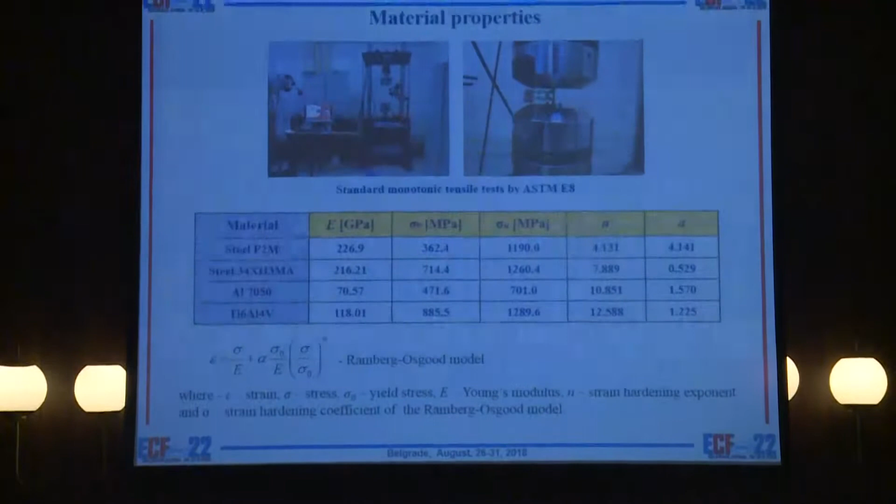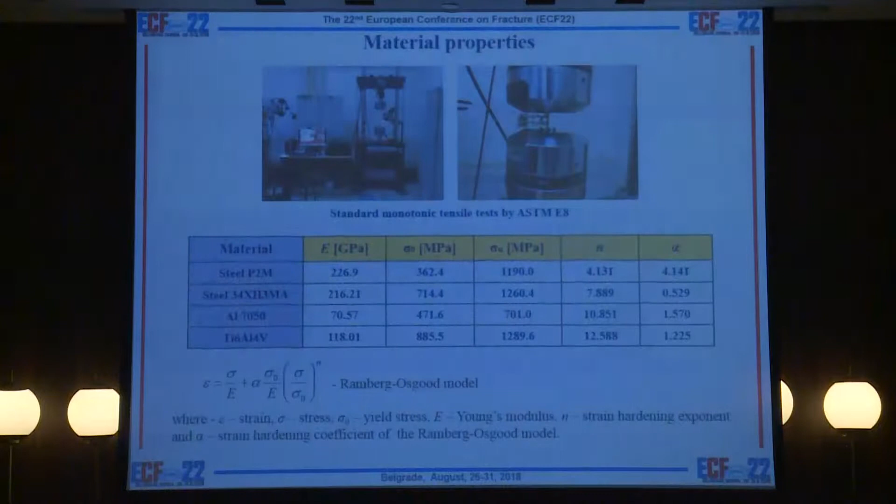As I said, one of the main aims of this study is evaluation of effects of elastic plastic material properties. We considered four types of materials: two types of construction steels, an aluminum alloy, and a titanium alloy. The main mechanical properties for each material were obtained by standard tensile tests, and stress strain curves for each material were described by the well-known Ramberg-Osgood equation. These mechanical properties form the basis of our finite element modeling.

Now I would like to talk about the nonlinear fracture resistance parameters which we analyzed in this study. The first of them is the stress triaxiality parameter. According to the well-known Professor Hutchinson, it is a very convenient parameter for describing in-plane and out-of-plane constraint effects in cracked bodies.

In this study, we proposed to use the plastic stress intensity factor for mixed mode characterization. The plastic stress intensity factor can be expressed directly through the elastic stress intensity factor by using the well-known Rice J integral. In order to calculate the plastic stress intensity factor, you need to know values of the governing parameter of the elastic plastic stress field around the crack tip, the In integral. We used a numerical procedure for calculation of the In integral proposed by our colleagues Professor Shlyannikov and Dr. Tumanov.

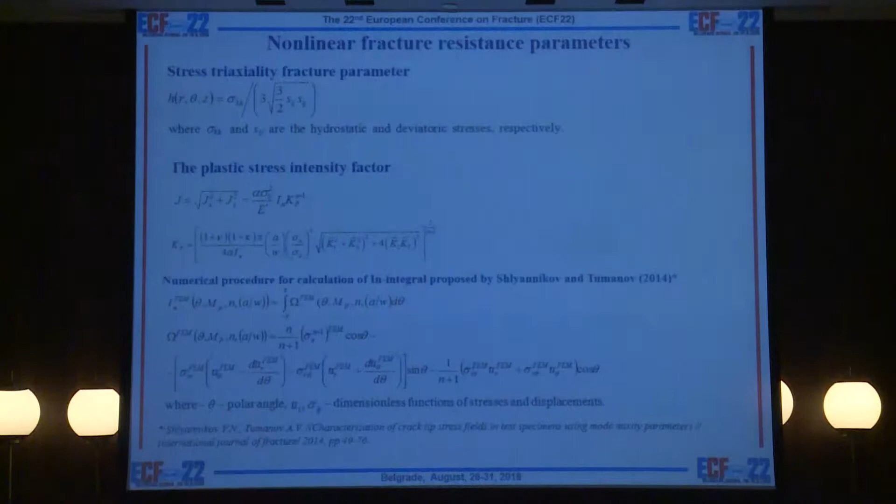The last nonlinear fracture resistance parameter is the well-known J integral. Some days ago, we had a great opportunity to attend the lecture of Professor James Rice. In this study, for calculation of J integral, we used the algorithm of numerical determination proposed by Lee and Liebowitz.

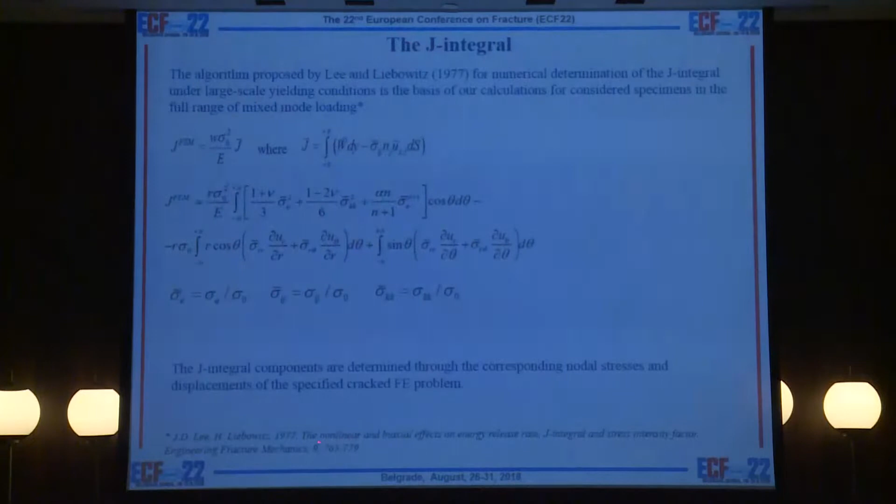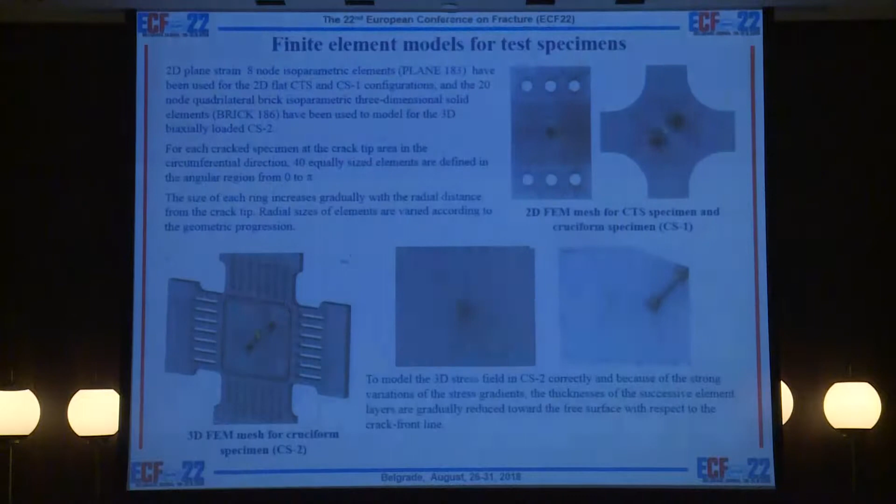In this figure, you can see the finite element models of considered test specimens. In the case of a compact tension specimen and a flat cruciform specimen, we used a plane strain 8-node isoparametric elements. And in the case of cruciform specimen with finite working area, we used three-dimensional 20 nodes isoparametric elements.

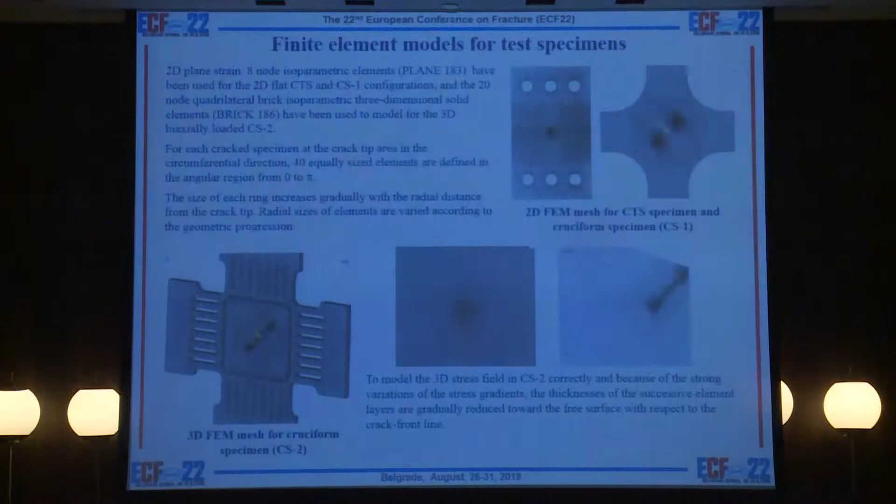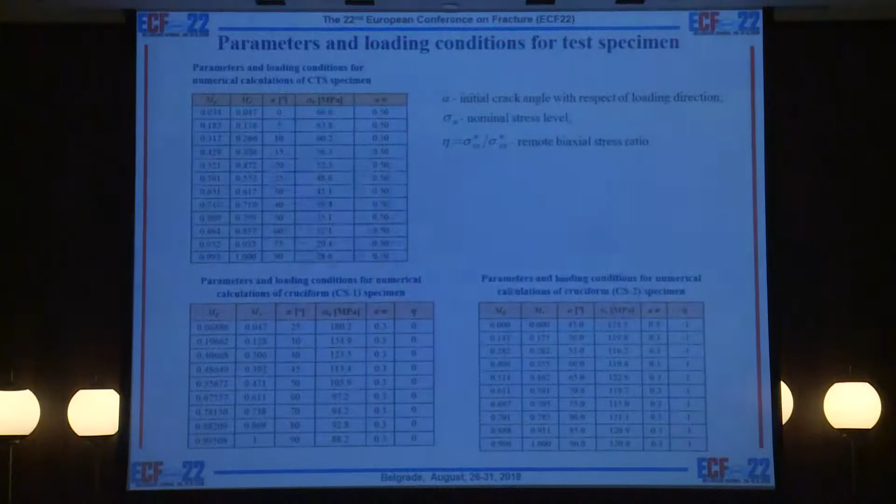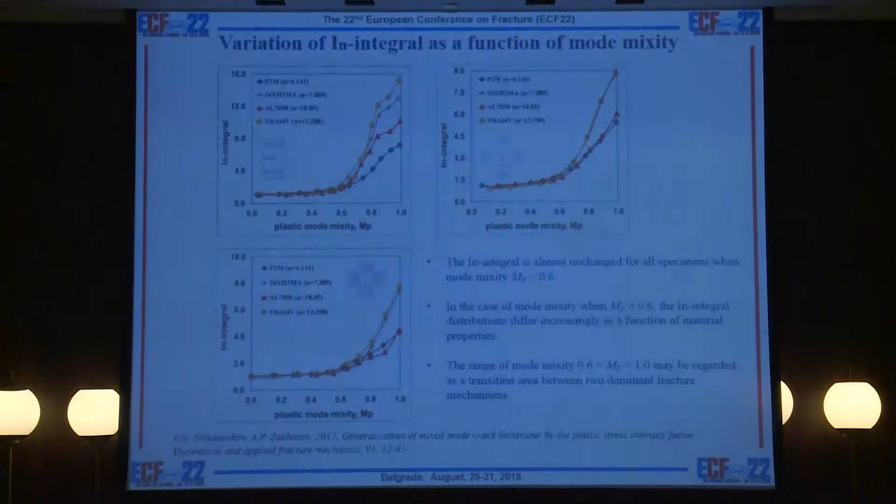mode mixity MP is lower than 0.6, and in the case of mode mixity when MP is higher than 0.6, it is observed a significant effect of elastic plastic material properties. And this region, when mode mixity MP varied from 0.6 up to unity, may be regarded as a transition area of between two dominant mechanisms.

In this figure, you can see the In-integral distribution as a function of specimen geometry. Again, I would like to pay your attention that influence of specimen geometry, constraint effect, is realized when the MP is higher than 0.6.

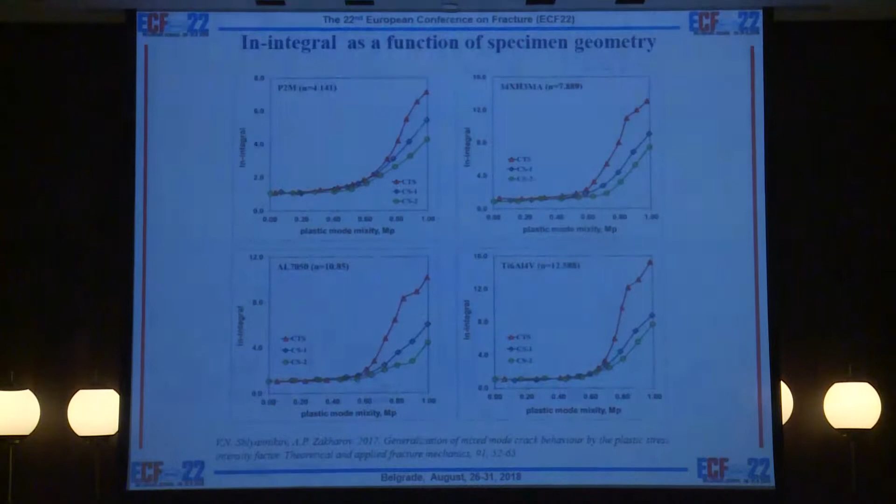And then in the next figure, you can see the distribution of stress triaxiality parameter. Again, significant effect of elastic plastic material properties is observed when mixed mode mixity parameter MP is higher than 0.75.

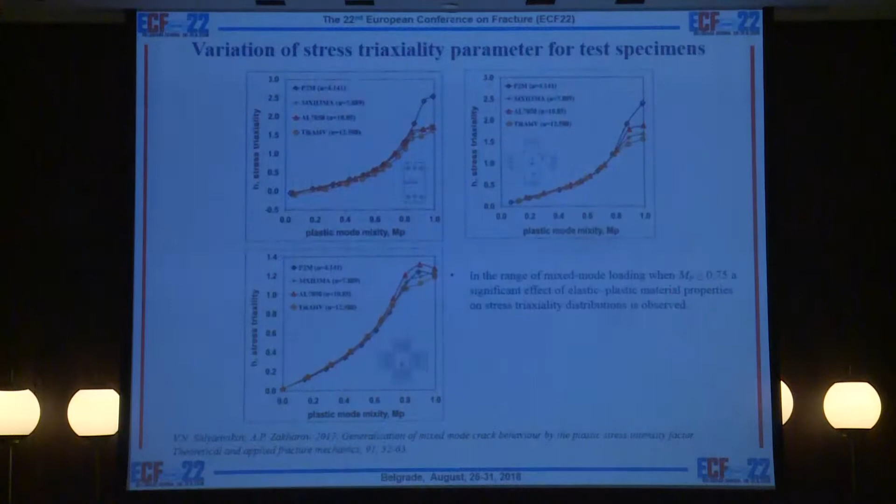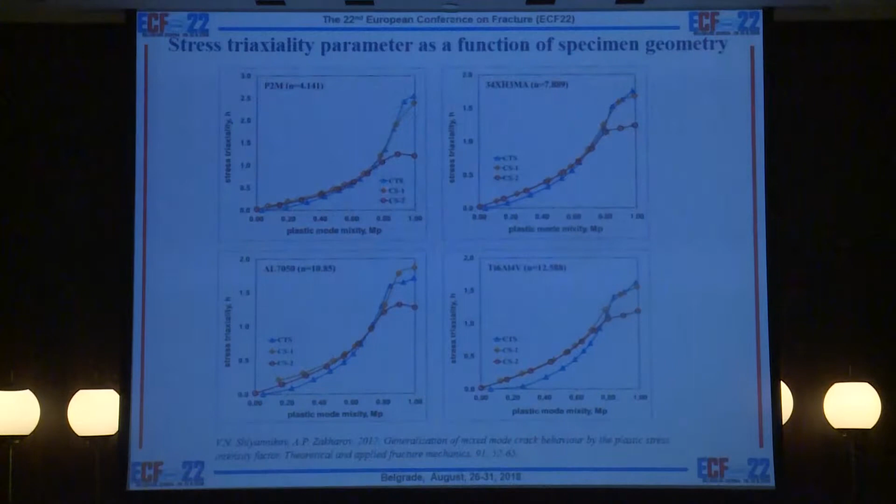In this figure, you can see the distributions of stress triaxiality parameter as a function of specimen geometry. And in contrary to the In distribution and stress triaxiality parameter, the J-integral, the elastic plastic material properties effect on the distribution of J-integral is observed in the full range of mixed modes from pure mode 2 up to pure mode 1.

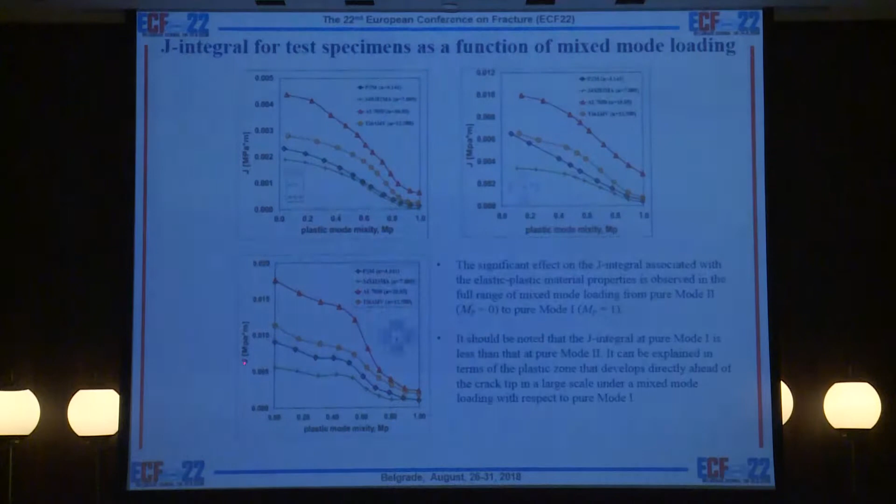Also, it should be noted that J-integral at pure mode 1 is less than J-integral at pure mode 2. So it can be explained in terms of plastic zone that develops directly ahead of a crack tip in a large scale under mixed mode loading with respect to pure mode 1 condition.

Again, you can see distributions of J-integral as a function of specimen geometry. You can see that J-integral is very sensitive to the constraint effects.

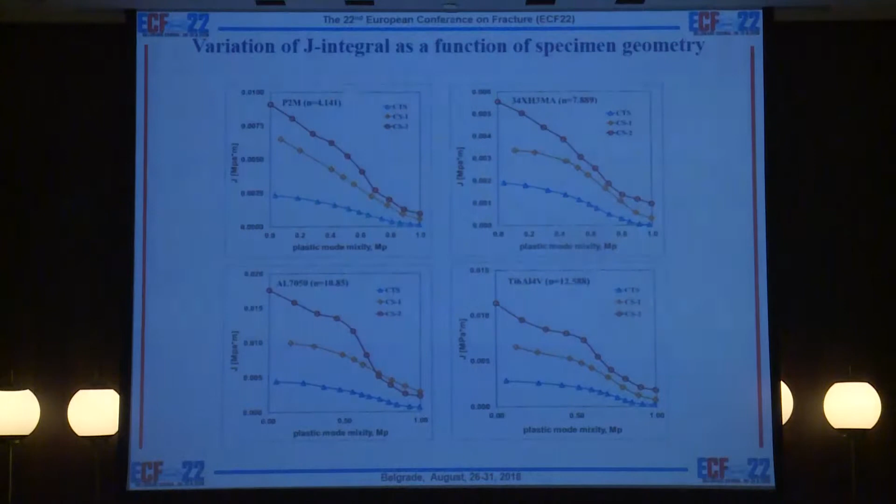In this figure, you can see results of calculation of plastic stress intensity factor for each considered test specimens. Again, I would like to pay your attention that in a range of mixed modes when MP is lower than 0.6, the plastic stress intensity factor is almost unchanged.

And of course, a significant effect of elastic plastic material properties on the plastic stress intensity factor distributions is observed in the full range of mixed mode loading.

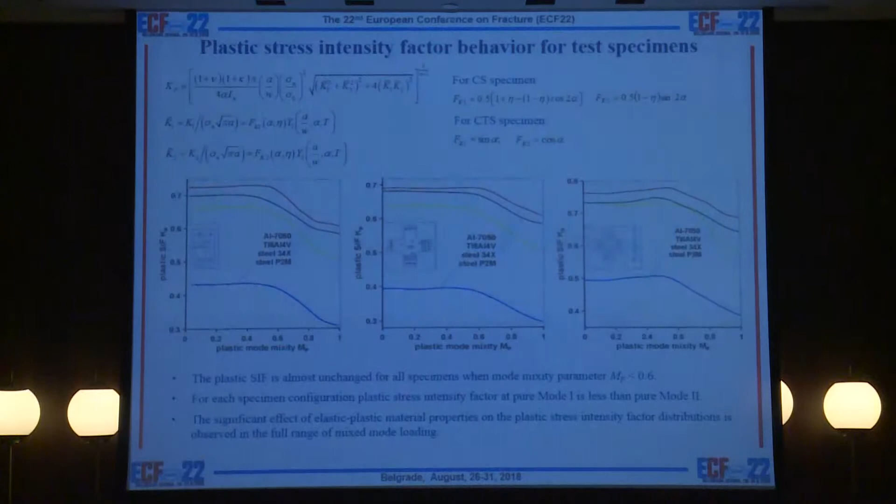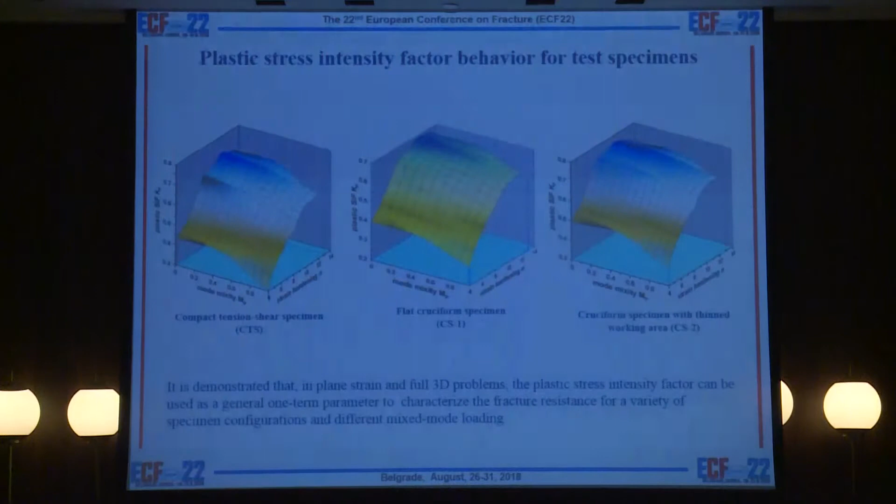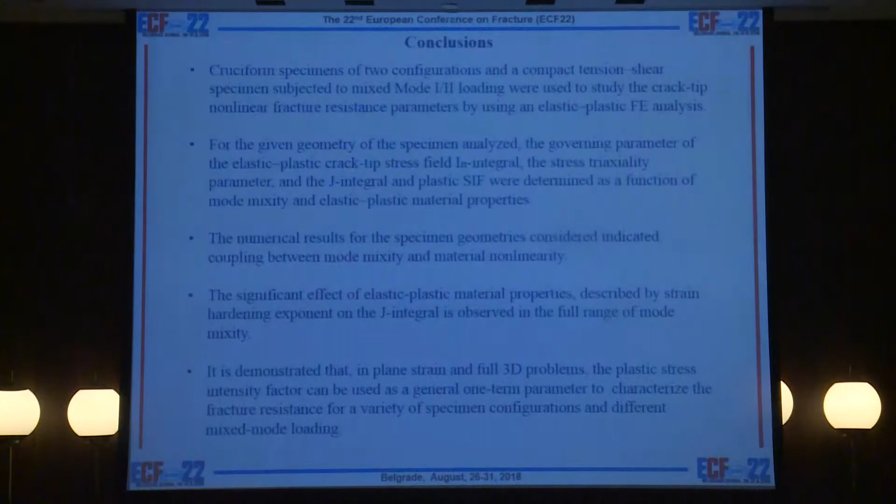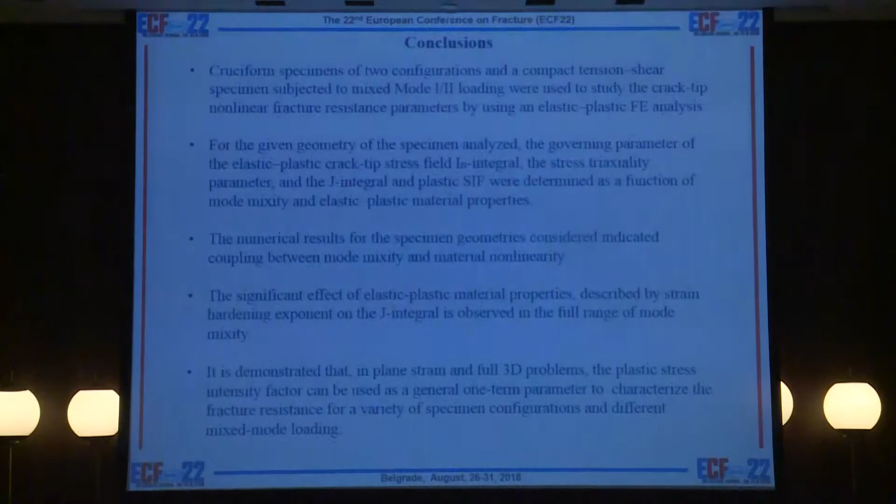And now I have to conclude. So cruciform specimens of two configurations and compact tension shear specimens subjected to mixed mode loading were used to study the crack tip nonlinear fracture resistance parameters by using elastic plastic finite element analysis.

For the given geometry of the specimen analyzed, the governing parameter of elastic plastic crack tip stress field In-integral and the stress triaxiality parameter, and the J-integral and plastic stress intensity factor were determined as a function of mode mixity and elastic plastic material properties.

The numerical results of the specimen geometries considered indicated coupling between mode mixity and material nonlinearity. A significant effect of elastic plastic material properties described by strain hardening exponent on J-integral is observed in the full range of mode mixity.

It is demonstrated that in plane strain and full 3D problems, the plastic stress intensity factor can be used as a general one-term parameter to characterize the fracture resistance for a variety of specimen configurations and different mixed mode loadings. Thank you very much for your attention.